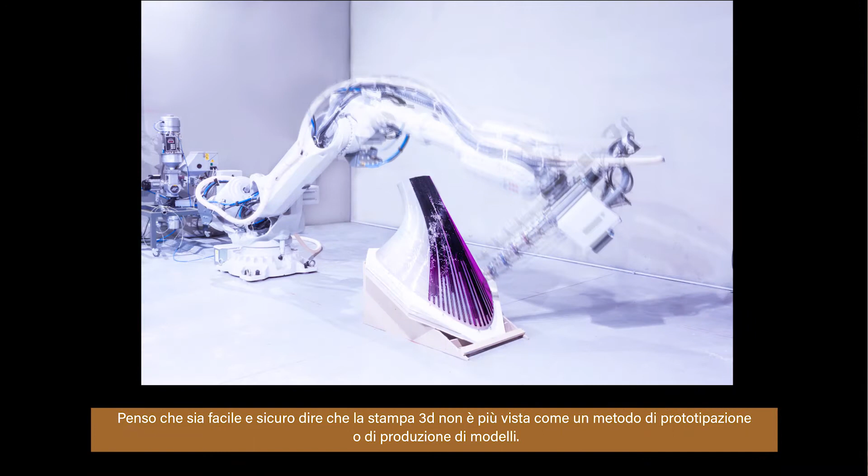And the work at ETH Zurich, to name a few. We also see additive manufacturing, or AM technology, providing companies with a more sustainable way of producing both socially and environmentally. I think it's safe and easy to say that 3D printing is no longer seen as just a prototyping or model producing method. As printers continue to scale up and have the ability to print more unique and architectural materials, and integrate both automation and AI, we're only beginning to see the true opportunities that technology has to offer in solving the problems of the future.

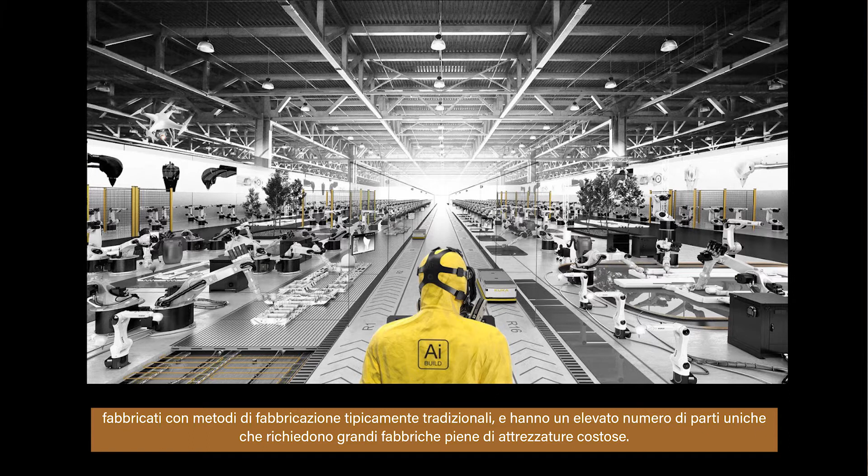I think for architecture to get there, we have to learn how other industries are incorporating the technology into their production processes. Currently, 3D printing is becoming mainstream across all major manufacturing areas, especially those like aerospace and automotive companies, where the products they are making through typically traditional manufacturing methods have a high number of unique parts which require large factories full of expensive tooling and skilled labor.

So once they begin to introduce 3D printing to the baseline of the manufacturing process, you will now have a more flexible tool than a fixed tool. That makes it easier to change, modify, and update designs in a current and future production run. This will ultimately reduce costs and provide a faster and more efficient workflow.

So, what are some of the predictions of the future for the technology? There are many experts and people in various industries having these discussions, and a few that I think are important and relevant are, first, 3D printing will need to become a mainstream technology for serial production.

3D printing has long since moved past being viewed as a prototyping solution. Every day companies are finding ways to incorporate the technology into their production, from tooling, replacement parts, and even building components. From automotive, aerospace, building, and consumer goods, companies are becoming aware of the advantages of 3D printing to the production line. According to a recent 3D printing report, 51% of companies are actually using 3D printing in production.

Specifically in the auto industry, major auto manufacturers are producing usable parts for the vehicles. For example, BMW recently announced its 1 millionth 3D printed part for its i8 Roadster. While the number of printed parts is low when compared to mass manufacturing volumes, the key to future growth will be to maintain momentum and commitment of developing technology and applications at a larger scale.

I do not see 3D printing becoming a replacement manufacturing process for, say, casting, machining, or molding, but it will certainly be interesting to see how it will become a viable and reliable production method that can be used with other technologies.

Second, I think more education and training will better help with the adoption of the technology. This does not only apply to the future workforce that is currently in school, but an investment in the existing workforce as well. In addition, I think 3D printing will need to become smarter in the future. We should anticipate that the industry is on a quest to improve printing efficiency with smart technology.

Hardware manufacturers will and are fitting machines with sensors and cameras that can measure various aspects of the build in real time, which helps with part documentation.

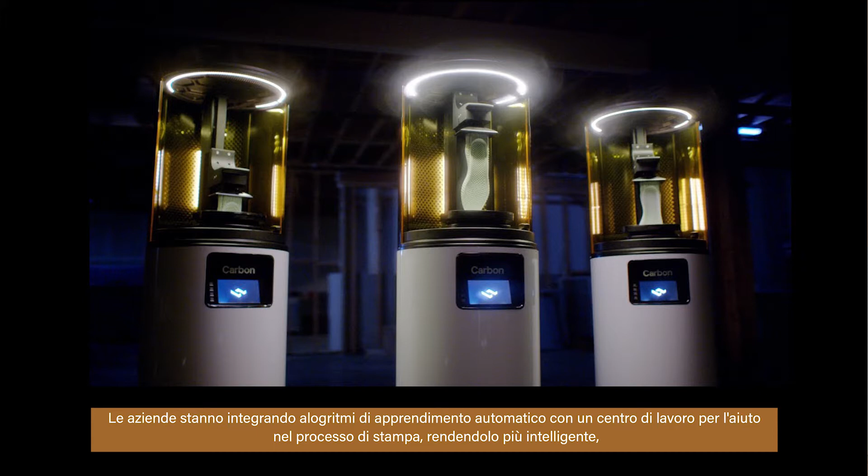Companies are integrating machine learning algorithms with sensors to aid in a smarter printing process, where data is gathered from the sensors and fed to the machine learning algorithm, and the results will provide feedback to an engineer for how the process can be improved. The information can also be used to predict part defects or build failures that can be communicated while parts are in production, and engineers can intervene in that process and eliminate any errors from happening.

Many materials such as concrete, ceramic, and plastics have been widely used for some time now and have many advantages for their low cost and diverse use, but it's the research in metals and composites that need to continue to improve and grow. When you read about the state of the metal printing industry, you will understand that it's not only one of the fastest growing areas, but an area that is far from reaching its potential.

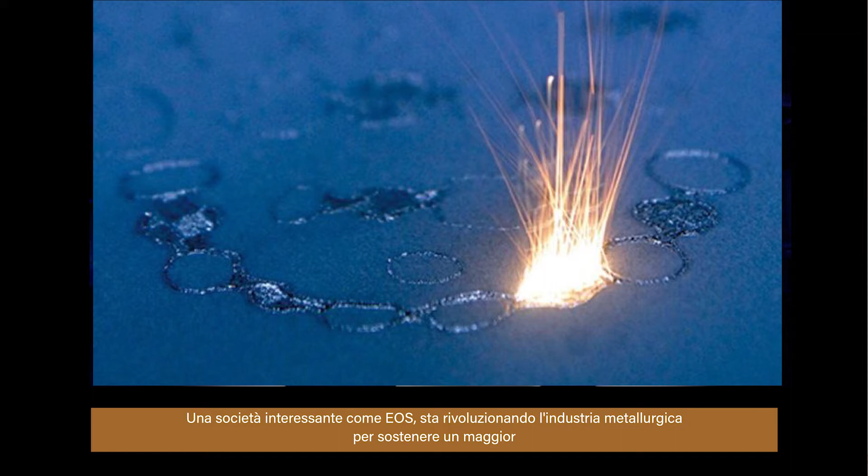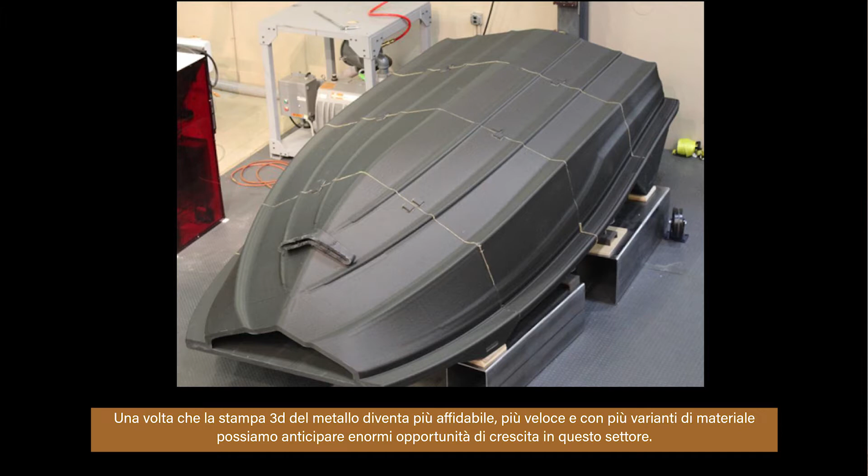An interesting company like EOS is revolutionizing the metal industry to support higher volume of printed parts, and even adding materials like stainless steel, aluminum, and grades of titanium. Once metal 3D printers become more reliable, faster, and with more material options, we can anticipate huge growth and opportunities in this industry. Composite 3D printing will also offer a huge opportunity.

Perhaps the newest segment in the 3D printing field, composite printing is highly sought after in aerospace, automotive, and many other industries due to its lightweight and strength properties. Industry analysis suggests this will be a $10 billion industry and will help reduce cost and time of traditional composite manufacturing processes. Companies like Markforged and Fortify are big players in the market, especially for small, affordable parts.

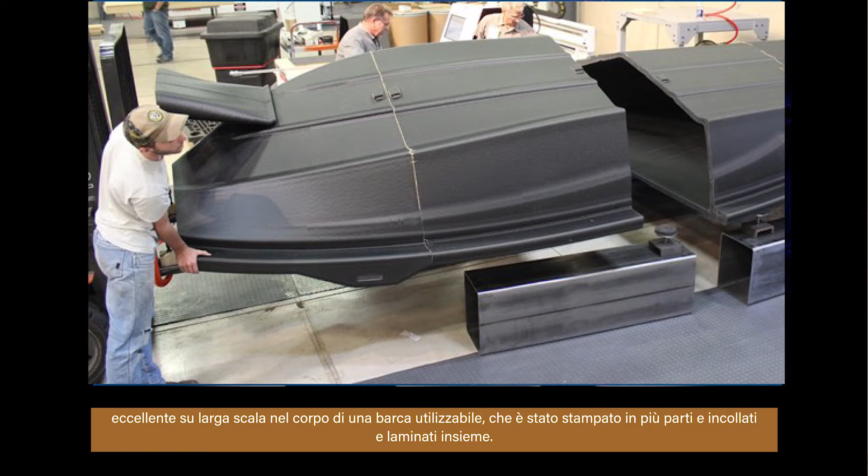But it's the work of Thermwood that's really exciting with their large format printing systems. You may have seen recently with their hybrid large format printer, they successfully printed a full-scale usable boat body, which was printed in multiple parts and then glued and laminated together.

Another key focus will be on automation. Automation is really the next step in the evolution of additive manufacturing, achieved through a combination of hardware and software, as well as robotics, sensors, and networks. Automation will ensure more streamlined processes as part of an end-to-end digital production cycle. On the hardware side, companies are launching new integrated production units which incorporate robotics and smart factory concepts to automate various steps of the workflow.

On the software side, post-processing will become one of the major sectors to watch out for. Automation will allow companies to transform 3D printing into a continuous process that will work much better in a volume production setting, which 3D printing does not quite have the capability for at this time.

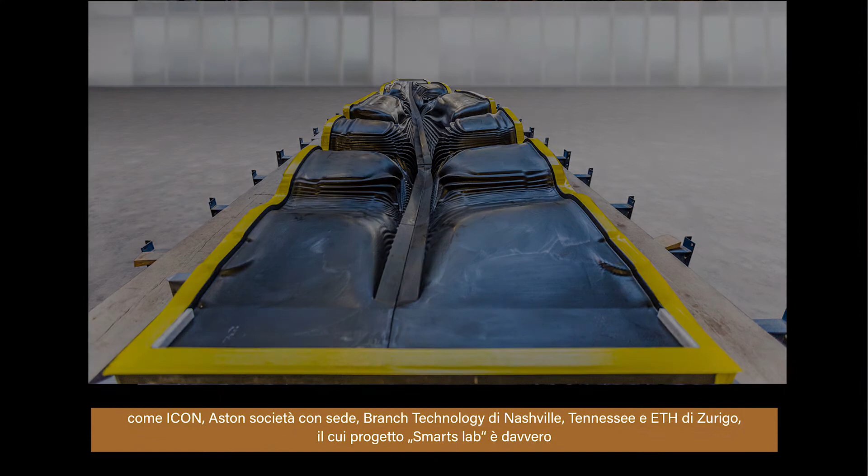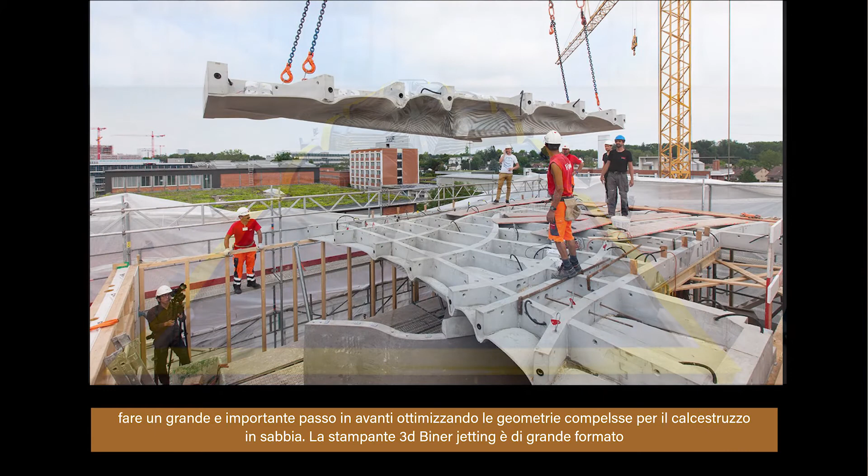So with that said, I think there are some very interesting companies and institutions to keep an eye on, many who are starting to implement a lot of these processes and ideas into their workflows, such as Icon, the Austin-based company, Branch Technology out of Nashville, Tennessee, and ETH Zurich, whose project Smart Slab is really making a great and important step forward, putting structurally optimized and geometrically complex concrete formwork in sand.

They use a large format binder jetting 3D printer. One advantage of this process is addressing the most resource intensive process in concrete construction, which is fabricating the formwork. Another advantage is the ability to have more performative slabs that use less material due to optimization of the slab thickness. And a third advantage is that everything is built and manufactured in a factory and then delivered and installed on site.

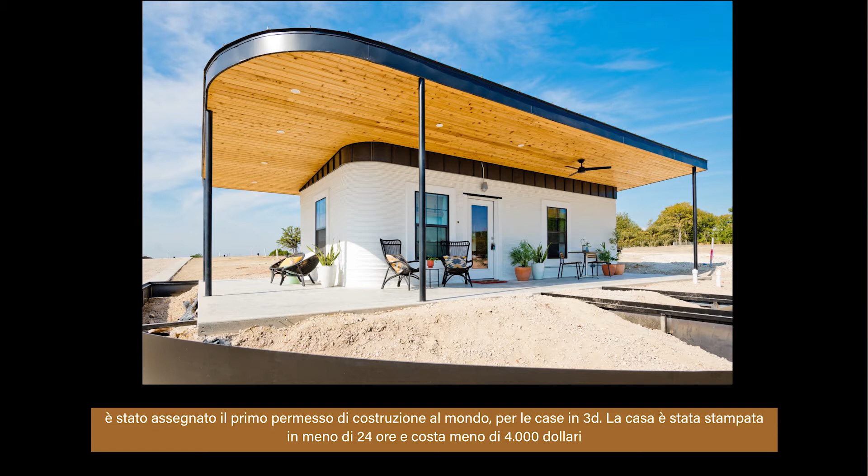The second company, Icon, built the first 3D printed home in the US and was awarded the first construction permit in the world to build homes. The house was printed in less than 24 hours and cost less than $4,000. The real aim of the company is solving housing issues and providing an affordable solution for people. They are currently building the world's first 3D printed community of low-income homes for people in Mexico.

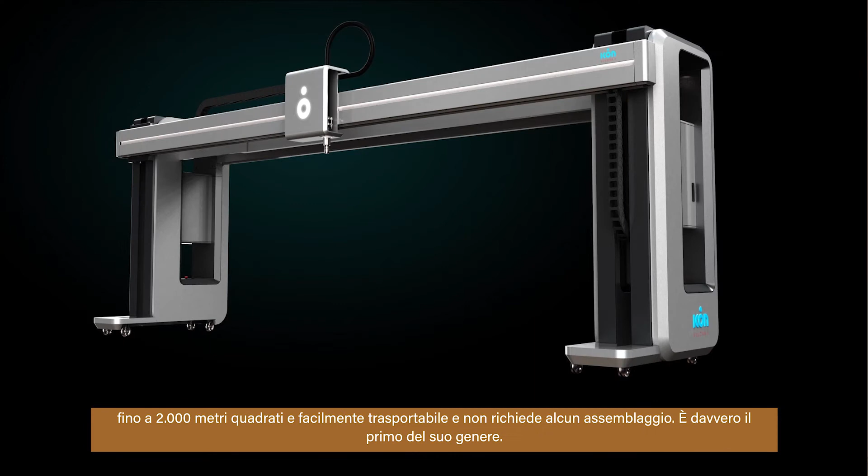In addition, they also design and sell large format concrete 3D printers. Their newest printer, called the Vulcan 2, has an expanded footprint large enough to print multiple story homes up to 2,000 square feet, and is easily transportable and doesn't require any assembly. It's really the first of its kind.

They use their patented concrete material called Lavacrete, which is able to be extruded and stand up on its own without any additional formwork needed. And the last company, and one that really is the most exciting, is Branch Technologies.

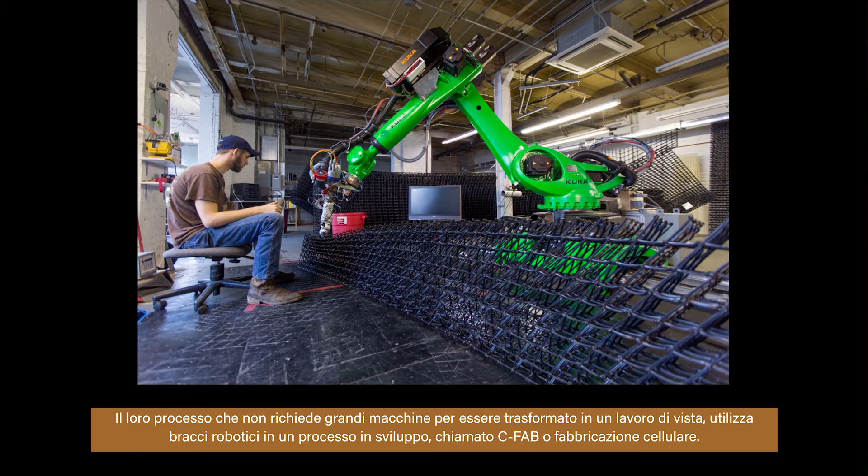Branch Technology is inventing a new way to build by providing an alternative to FDM printing processes when scaling up printing for the construction industry. Their process, which does not require a large machine to be transported to a job site, uses robotic arms in a process they developed called CFAB, or cellular fabrication.

This process allows for freedom of 3D printing parts using a 3D printed material comprised of fiber-reinforced polymers that solidifies in free space without the need of any support material. The advantage is that it removes geometric and material limitations typical of FDM and uses up to 20% less material in the process.

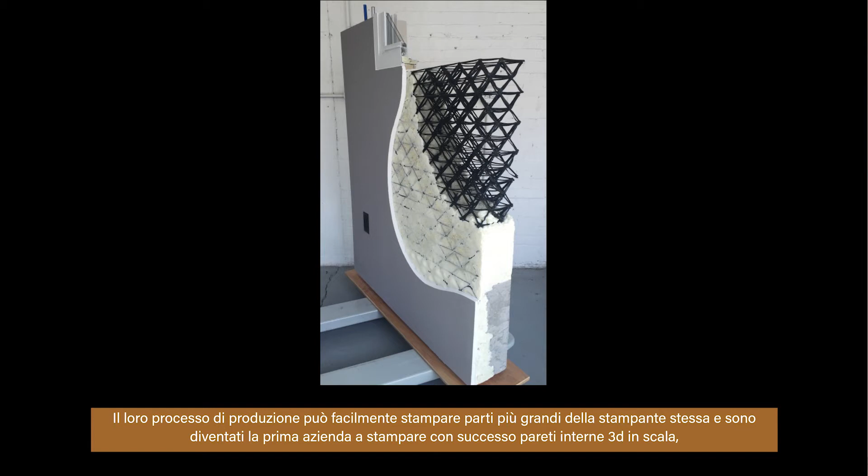Their production process can easily print parts larger than the printer itself, and they have become the first company to successfully 3D print interior walls to scale, with the production utilizing a space-filling lattice structure that is lightweight, strong, and reduces material at the same time.

Their advantages are prefabricated parts which yield higher quality of finished parts, built in a controlled environment, and the accuracy of robotic arms. An additional unique advantage of their system is they apply and use other economical and known construction materials to make a wall assembly, for example.

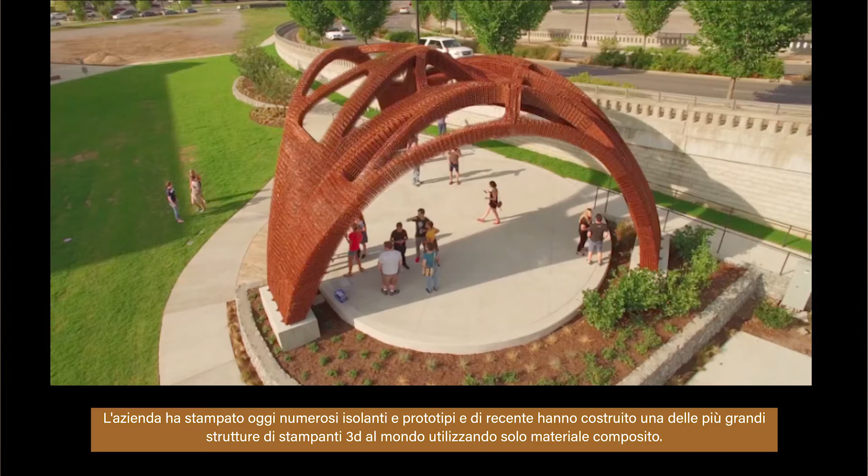Once all the materials come together, it has a composite effect that functions like a real wall, but is actually much stronger. The company has printed numerous installations and prototypes to date, and recently they constructed one of the world's largest 3D printed structures using only a composite material. The structure stands at over 6 meters in height and 14 meters in width.

So I think it's really safe to say that there are a lot of really important trends, companies, and researchers all shaping the future of 3D printing in architecture and other industries. And so I think it's safe to say that we are closer to living in homes and cities that will be completely 3D printed in the near future.

Not only do I think it's possible, I think it's already happening and happening in a big way. When it comes to 3D printing in space, there are three potential areas where it can be beneficial: one, fabrication of spare parts; two, construction of space structures and habitats; and three, the preparation of food.

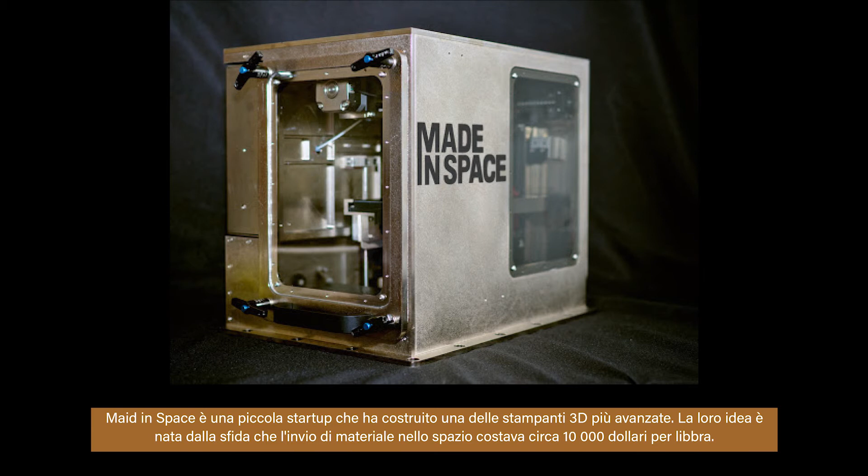When it comes to the fabrication of spare parts, this has been ongoing for some time, maybe 6 or 7 years, and was shaped by a company called Made in Space, a small startup who built one of the most advanced 3D printers. Their idea developed from the challenge that it cost upwards of around $10,000 per pound to send material into space.

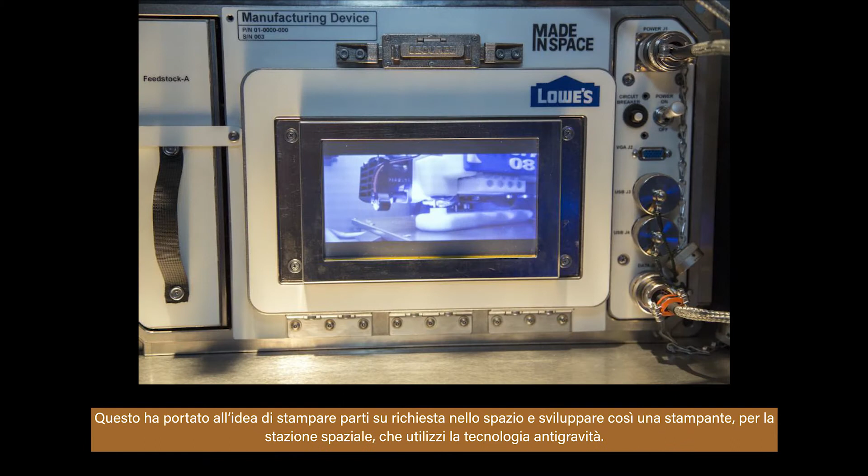What they realized is that there are also large amounts of spare parts on the space station, just in case something happens. This led to their idea to print on-demand parts in space and develop a printer for the space station that utilized zero-gravity technology.

A few years ago, in 2014, they successfully printed for the first time a part in space, and it was the first part actually manufactured in space. This new ability to 3D print parts and tools on demand dramatically reduces the time it takes to get parts to orbit, and increases the reliability and safety of space missions while decreasing costs.

Current space missions take months to years to get into orbit. With 3D printing, parts can be built within minutes to hours. Once they began to realize all this and had a lot of success, they understood that it really doesn't make sense to fabricate on Earth and launch parts little by little into space.

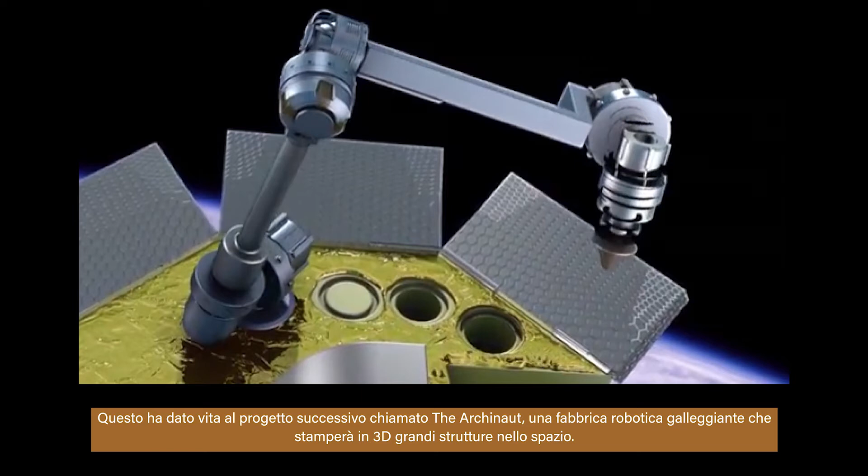This set up the next project called the Archinaut, a floating robotic factory that will 3D print and assemble large structures in space. The benefits of this future project will be building in-space structures for a fraction of the cost, and lighter than what is necessary to launch currently from Earth.

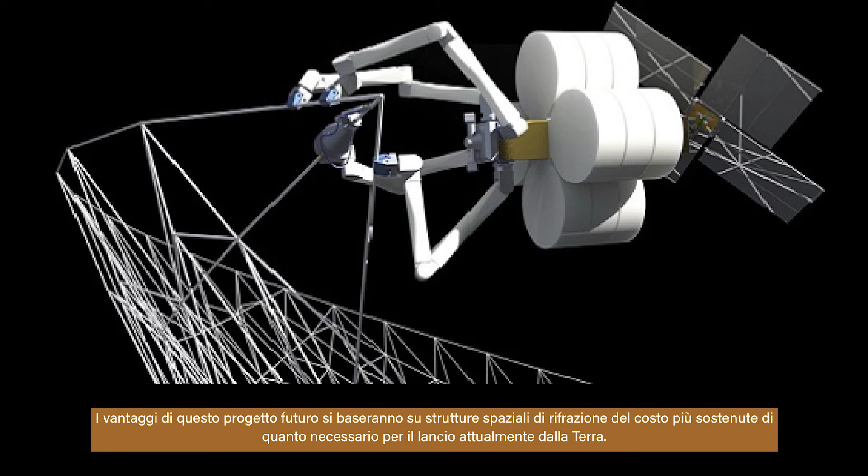Additional benefits will be to launch raw materials into space and print on demand needed parts and structures that could be a viable solution for getting us to Mars and to other planets.

Printing habitable structures might be the most interesting from an architectural perspective. David Malott of the company AI Space Factory explains that building on another planet is not just a design or technology problem, it is a construction problem. Engineering, material research and development, and autonomous manufacturing techniques will need to be brought together to construct beyond Earth.

There's a huge cost associated with sending materials into space, but one possible solution according to AI Space Factory would be to launch robotic rovers capable of constructing on the planets they land on, using the materials that exist on that planet.

Autonomous construction could and would allow them to build structures layer by layer without the need for humans to be on site.

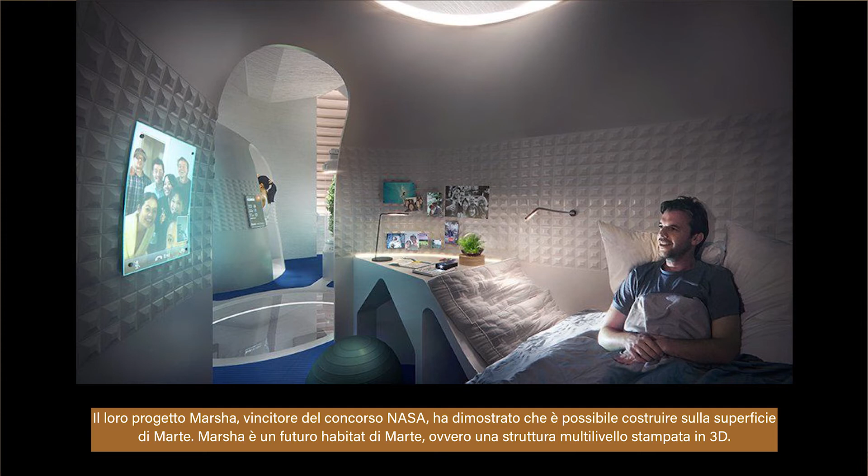Their NASA award-winning project Marsha proved that it's possible to build on the surface of Mars. Marsha is a future Mars habitat that is a 3D printed multi-level structure. The material is comprised of something available on Mars, and it's constructed with a robot which they developed and believe will be an autonomous process.

It is one of the first proposals that builds above the Mars surface, which is a challenge due to the high amount of radiation on the planet.

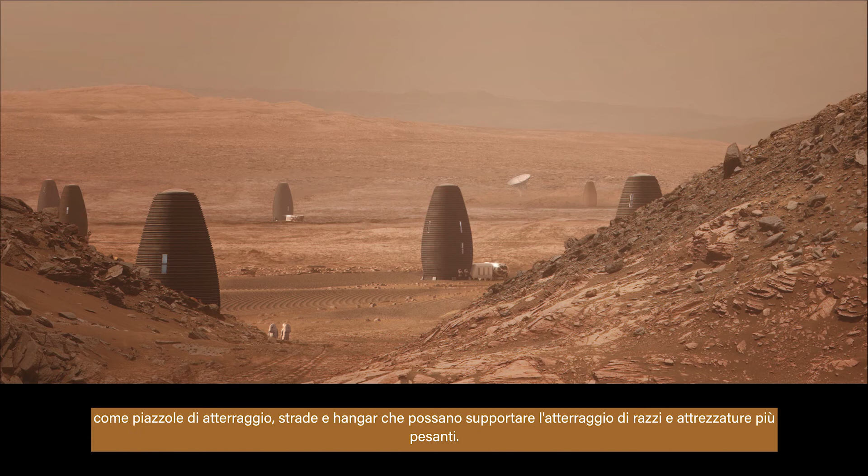An interesting project nonetheless, but in order to print or build habitats on another planet, it will first be necessary to build surface infrastructure, such as landing pads, roads, and hangars that can support landing heavier rockets and equipment.

As we get closer to understanding how to inhabit other planets like the Moon and Mars, it's safe to say that 3D printing will play a critical role in allowing us to do that, whether it's 3D printing parts here on Earth, manufacturing and assembling in space, or constructing habitats on Mars.

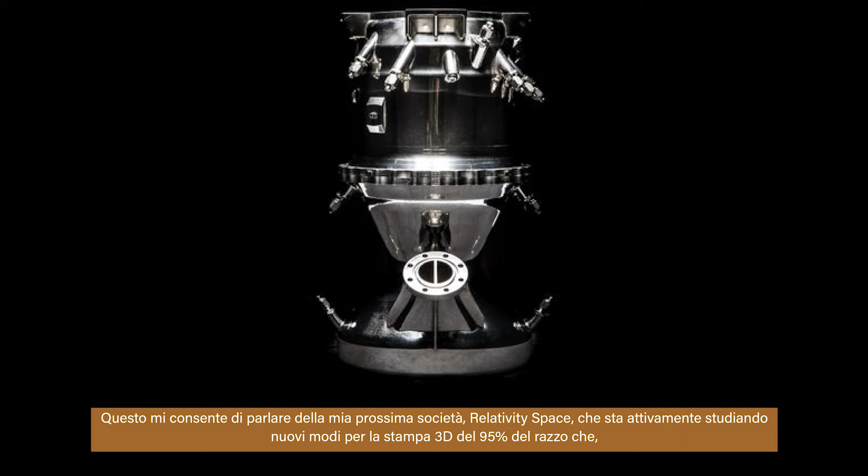Which leads me to my next company, Relativity Space, who is actively pursuing novel ways for 3D printing 95% of a rocket, which they view will be the next big disruption in the rocket industry.

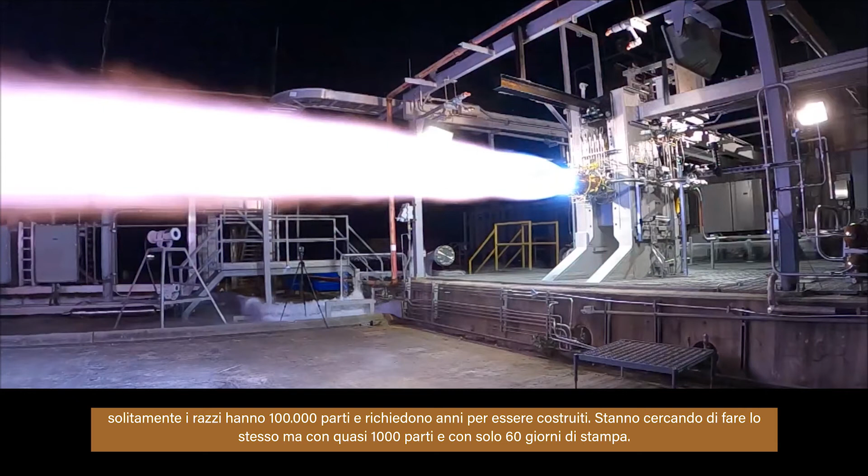Relativity Space is on a path to change the rocket industry, where typically rockets have 100,000 parts and take years to construct. They are trying to do the same with a mere 1,000 parts and only 60 days of printing. They have already successfully printed and tested a rocket engine in only 3 parts, compared with traditional engines which can have up to 3,000 parts.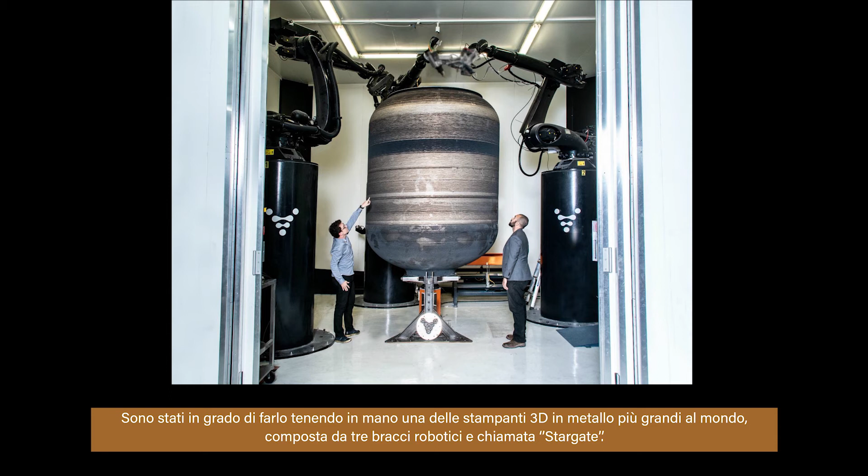To date, they have successfully tested over 300 rocket engine tests. They've been able to do this by building one of the world's largest metal 3D printers, comprised of 3 robotic arms, called Stargate. Stargate works by having one robotic arm connected with a deposition head where aluminum alloy feeds layer by layer, and the other 2 robotic arms simultaneously perform post-processing and inspection functions like tank polishing, surface removal, checking for abnormalities, and quality control on finished products.

The advantage of printing fewer parts is obvious. Not only does it reduce manufacturing time, but it also produces parts that are more reliable.

Obviously, there are a number of advantages that 3D printing has over traditional manufacturing and machining methods. However, as with every method of production, 3D printing also has its issues and drawbacks. First we can outline some of the advantages or pros of the technology.

There's freedom of design, meaning that printing affords the ability to produce complex geometry that machining and injection molding may struggle with or may simply not be able to make. Sometimes part geometries have complex geometry impossible to be machined or removed from a mold. Additive manufacturing makes printing complex geometry possible through various printing processes and support material.

Rapid prototyping allows for parts to be produced in hours instead of days, which reduces overall cost and greatly increases speed of the design and iterative process.

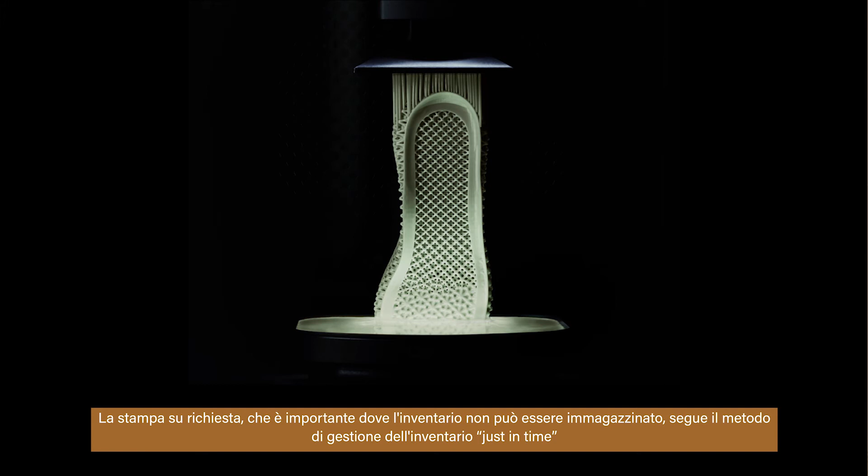Printing on demand, which is important where inventory cannot be stored, follows the just-in-time inventory management method. Rather than producing in bulk, it will free up inventory, it'll free up financial assets, and because all files exist digitally, it is easy to go back through your library and print a new part when you need it.

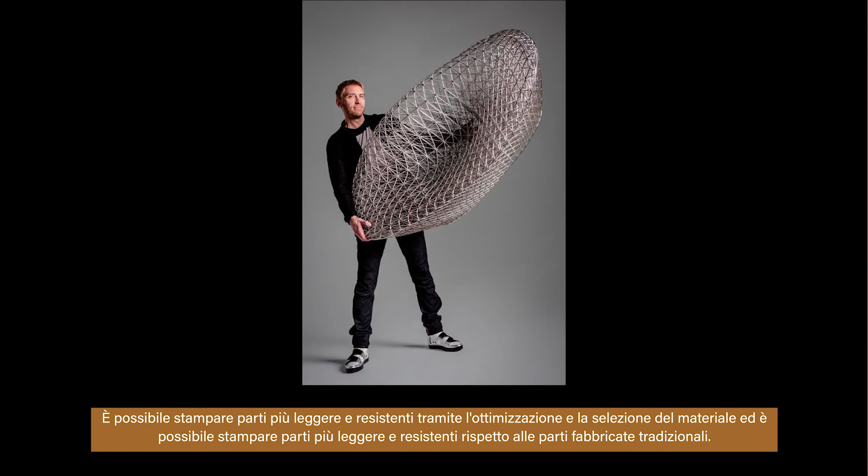You can print lighter and stronger parts. Through optimization and material selection, it's possible to print lighter and stronger parts than traditionally fabricated parts. In industries where fuel economy is important, lighter parts are an advantage for better fuel economy.

There's waste reduction, which means a more sustainable process of fabrication. Since printing is an additive process, you only use the material needed to produce the part, as opposed to machining, which cuts away large chunks of often non-recyclable material. This will ultimately reduce the cost of a part, since you will only be paying for the material used instead of paying for the waste also.

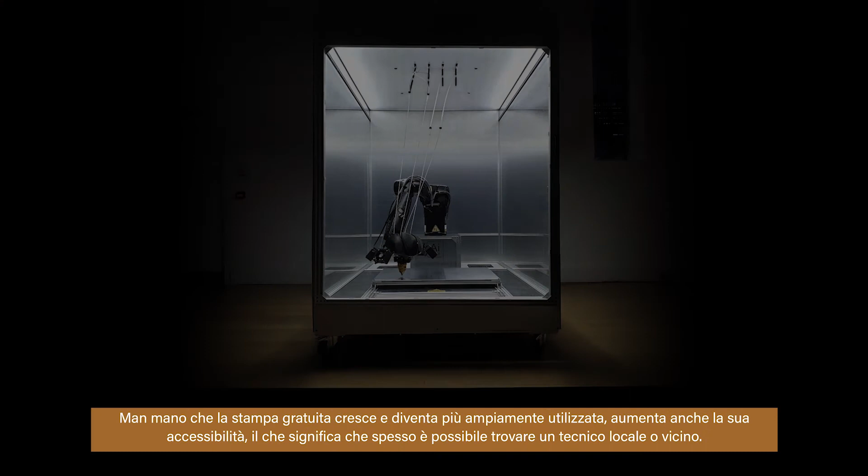You could imagine that 3D printing will be more cost effective since you have one machine that does multiple processes and reduces the amount of energy instead of multi-step fabrication processes, which use multiple machines and a lot of complex labor. Lastly, accessibility. As 3D printing grows and becomes more widely used, its accessibility also increases, meaning that you can often find a local or nearby servicer if you choose to outsource your 3D printing. This will likely save you time on transport and cost, as many traditional manufacturing methods are still produced abroad.

3D printing also has its issues and challenges. There's limited materials. 3D printing is not yet versatile enough to work with most materials. Various plastics, metals, and concrete are available, but there are limited options that are easily recyclable and, for example, food safe. There are limited binders for powder-based materials.

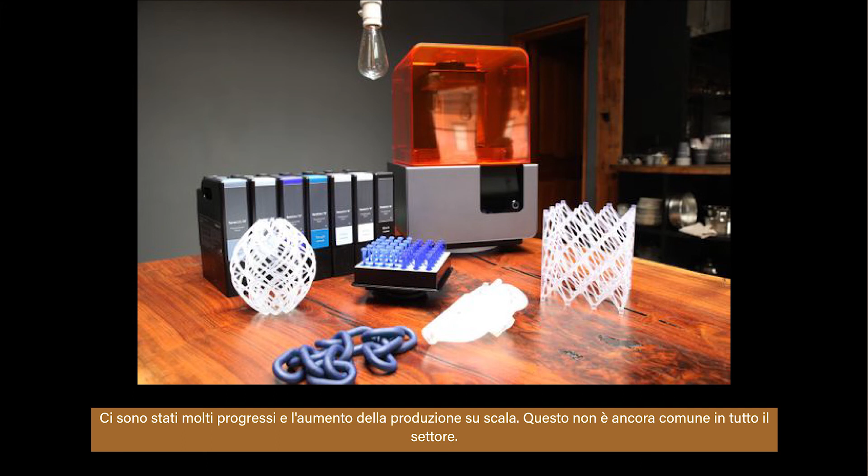Another issue is limited build volumes. Although this is rapidly changing, there have been many advances in increasing the scale of production, but this is not yet common across the industry. Having to print parts in sections and then post-process by gluing or some other method of post-production is not ideal.

Post-production is a common issue across all printer scales, materials, and formats. Post-processing is typically required to remove support material and smooth the surface finish. Additional machines are also typical in the post-production process, such as water jetting, sanding, chemical soaks, assembly, and more. The amount of post-production on a part does vary based on scale, material, and printer type.

Part structure is a critical issue and one that plagues many types of material. With additive manufacturing, parts are printed in layers that adhere to one another during the process. So what that means is that under stress or part orientation, the layers may separate, causing the part to essentially break under any stress. For FDM printing, there is more of a significant problem than other types of printing, such as SLS. Polyjet parts are solid in their material composition, but the results can be very brittle. So delamination of parts, brittle parts, and nozzle extrusion inconsistencies can be common issues that can have a negative effect on part structure.

With the perks 3D printing brings, we might be entering a new post-industrial manufacturing age, where products are built faster and are significantly cheaper than ever before. However, this printing technology also has its own set of drawbacks that should not be ignored, better understood and mitigated. One thing is certain though, 3D printing's technology and market share will increase, and there will be a continuous trend for customization in the future.